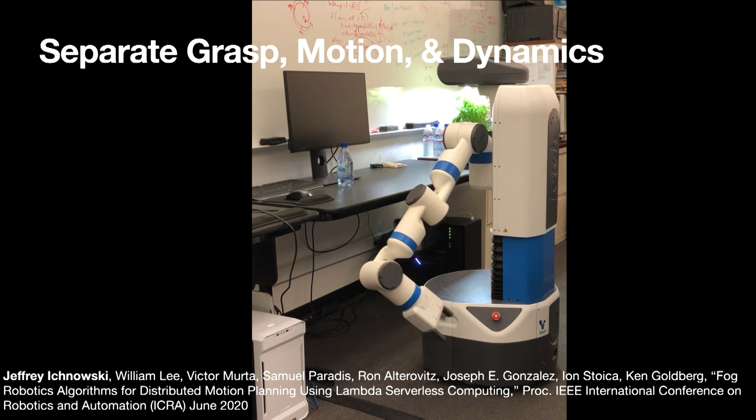So I'm going to get to my talk that I'm titling Dynamic Robot Manipulation, Learned Optimization, Deformable Materials, and the Cloud. But really, this is more my talk about how I like to make robots go fast and compute fast. A lot of my research started off, just to start the groundwork, looking at separate interests. Like, let's do a grasp plan, let's do a motion plan, let's do time parameterization, or treating the world as rigid, or looking at how can we speed up these limited computing capabilities that we have in robots.

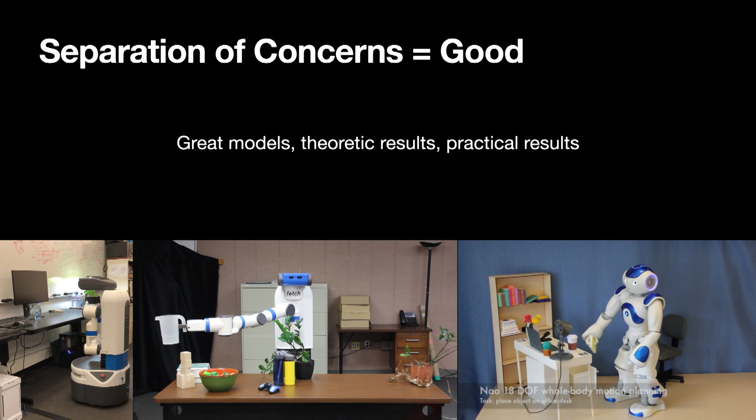Now these separations of concerns are good. From an engineering standpoint, they're great to have. We get great models, great theoretic results, good practical results. But now my interests are more in what can happen when we start combining these things together. If we do grasp and motion planning at the same time, can we have a faster motion because we can have that grasp perturbed towards having a faster motion? Or if we do time parameterization at the same time as the motion planning and the grasp planning, can we get very fast motions that have all these things incorporated in them?

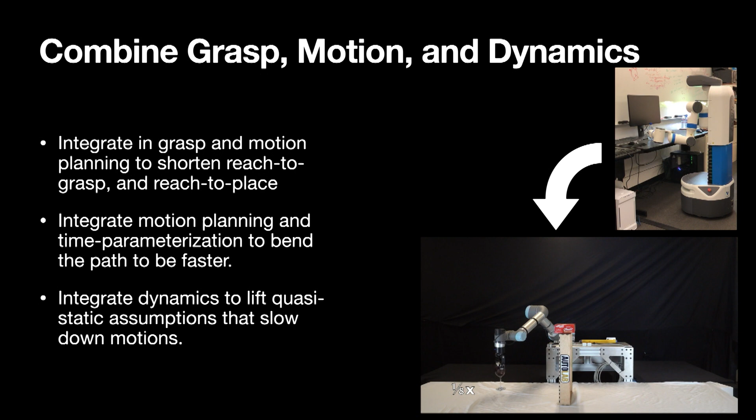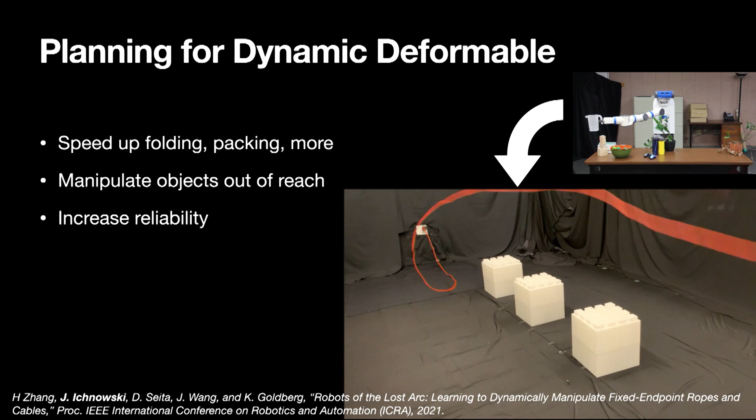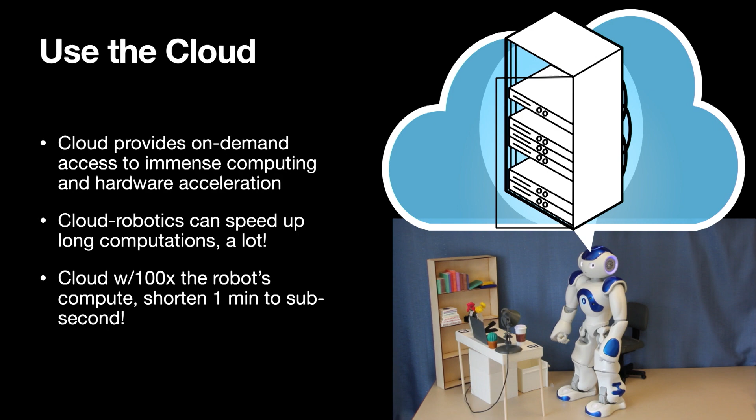And the last thing I'm going to talk about is using the cloud. The reason I'm proposing the cloud is because we want to be able to compute things fast in a lot of cases. With the power of the cloud, we can speed things up by 100-fold and make things that used to take more than a minute to compute run in a sub-second. We can start to get much more capability out of our robots that we might not have had unless we waited 10, 20 years for computing to catch up. So here's the agenda: this combination of grasp, motion, and time parameterization, learned optimization, dynamic deformable manipulation, and cloud robotics.

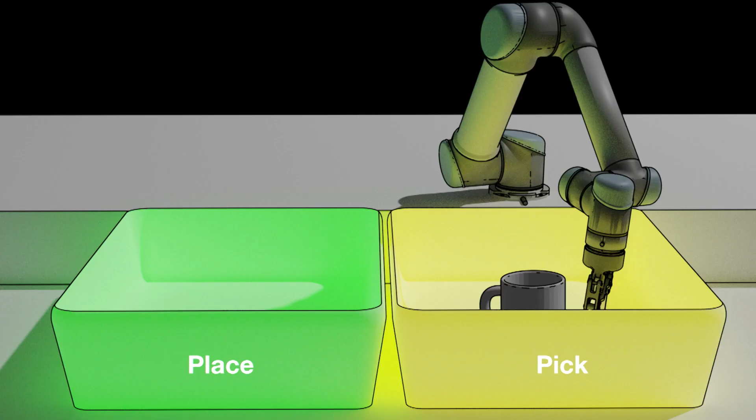So just to get started on the first agenda item: e-commerce. E-commerce is exploding today and cannot keep up with demand. This has been a huge motivation for this line of work. How do we keep up with demand imposed by the pandemic or by social distancing required within warehouses? A lot of warehouse operations boil down to pick and place, whether it's bin to bin, shelf to shelf, or bin to shelf. The pipeline looks something like this: at the front end you do imaging, segmentation, grasp analysis, and then motions to reach to pick and pick to place. But due to advances in deep learning, the front end is now insanely fast, and the physical motions of the robots are dominating the cycle times.

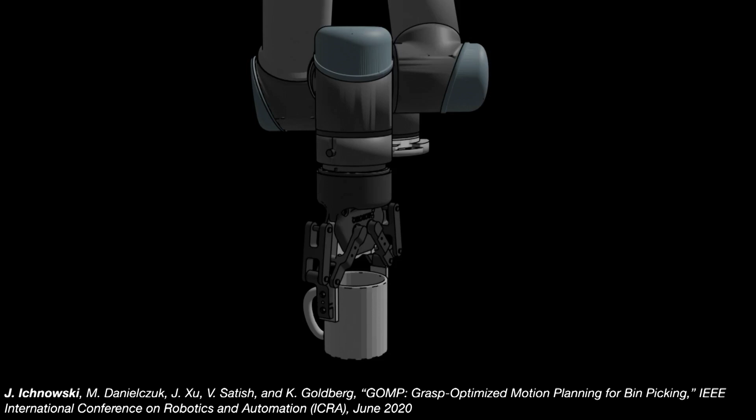So if we start off with a grasp analysis, say something produced by DexNet, grasp analysis gives these contact points that say we can lift up this object safely and robustly, and the object will not fall out of the gripper. In a normal pick-and-place operation, a gripper might take a top-down grasp, lift up the object, and go around. But our key insight here was that this actually implies a degree of freedom that we can incorporate into our motion.

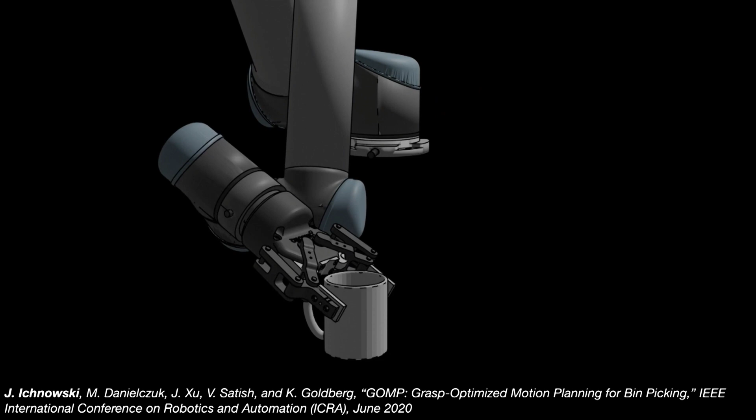Any of these poses around those contact points is something that we can use to speed up a motion if we can get our optimization to use it. So I'm going to give a bit of an overview of how we do this. This may be some material that everyone's familiar with, but it lays the groundwork for a lot of the other parts of the subsequent presentation.

So we came up with something called Grasp Optimized Motion Planning, GOMP, where our objective is to minimize trajectory duration subject to the constraints that I mentioned: we have these grasp analysis constraints, we want to avoid obstacles, and we have the joint limits that we need to obey. Of course, those first two sets of constraints are non-convex, and the way we approached this was to discretize a trajectory with a fixed time step and place it into an optimization.

And we have this quadratic optimization where our objective is to, in this case, minimize the sum of squared accelerations. Other formulations are, of course, possible. So first I'm going to describe how we minimize this, and then how we minimize the time on it. Putting together our optimization formulation, we have our joint limits: the configuration limits, the velocity limits, acceleration limits. We have our boundary conditions that we want it to start and stop with 0 velocity. And we add in an MPC-style constraint between each of the waypoints that we've discretized to.

And then for the non-convex constraints, we use essentially TrajOpt, the formulation that they have. The way this works is that you take an obstacle, for example, this bin wall that we're trying to clear, and you want to keep the robot out of that. But since we're optimizing in the joint space, we need to go through the Jacobian and do linearization of the constraint. Of course, this linearization is only good for part of the motion. If we continue to optimize, it will be invalid. So yeah, this is what it looks like, and I will get to that in a second.

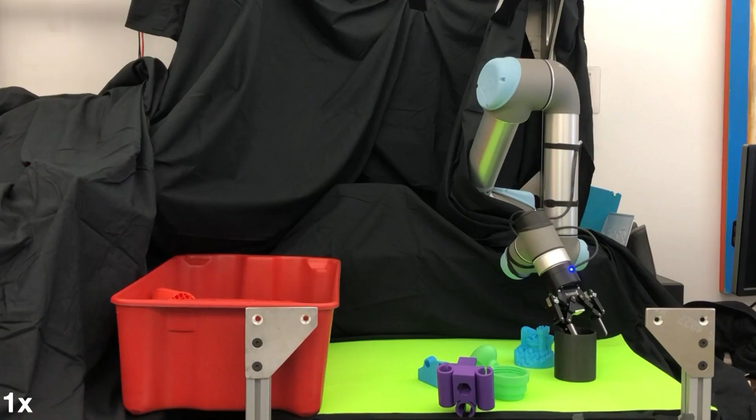And one of the things I want to point out here is that this trajectory has properties of time-optimal trajectories, where at any point in time, one or more of the joints is at a derivative limit, a velocity limit or an acceleration limit. So we put this all together, and we get a very fast pick and place. We beat our baseline by a significant amount. And one thing that's actually kind of surprising is that our bottleneck actually became the gripper close speed. The gripper takes more time to close and open than the motion after this optimization.

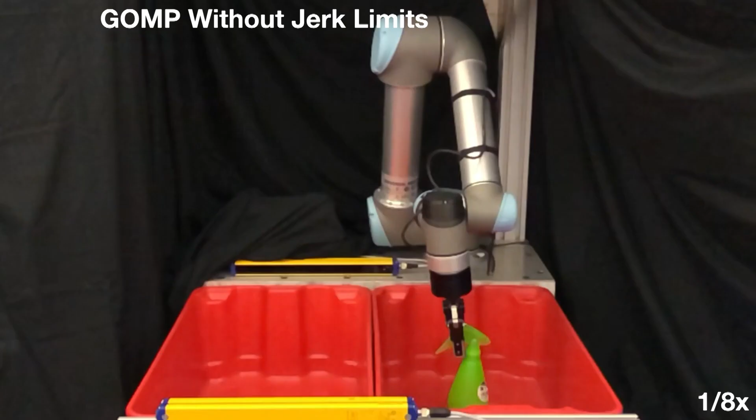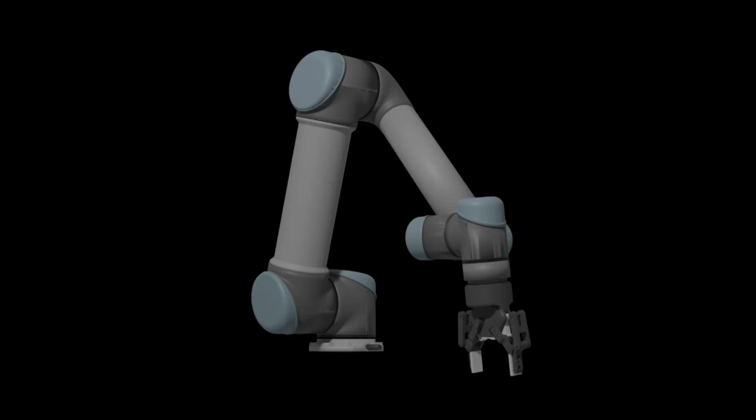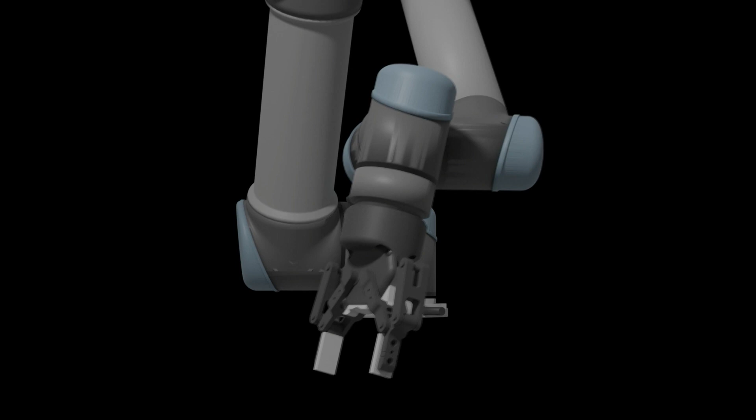So we took a deeper look into this, and we found that we weren't doing any jerk limits. As an implementation detail, this robot is an industrial robot. We do not have access to directly control its motor torques. We have to tell it the trajectory that it's following, and its internal black box controller is doing its best to follow it. But without the jerk limits incorporated into our optimization, if we play back the planned trajectory and overlay it with the trajectory we get from the encoders, we see that there's overshoot at the end, and that's due mostly to not having that jerk limit. The other thing we're worried about is stressing the joints and wearing out the motors over time. Now, we added jerk to this optimization, and a surprising thing happened.

The compute time blew up to 28 seconds median time, which, of course, is really not useful for sub-second motions that we're trying to get. So we don't want to spend 28 seconds to get a sub-second motion. So this leads into the learned optimization aspect of the talk. So we looked at speeding up this computation from two sides. We sped up the outer loop and the inner loop.

Oh, yeah? But our torque, I know the URs don't give you access to torque, but are torque limits a thing? I mean, if you were carrying a heavy object, would you still be able to live near those acceleration constraints published by the UR, or is this a... You have to adjust your acceleration constraints proportionally, yeah. You adjust them in proportion to the weight? Yeah. That's a good enough heuristic? Or? Yeah, it seems to me, yeah. I mean, we could probably push it a little bit more if we directly incorporated a lot of those constraints. So far, we're going kind of fast enough for our purposes.

So I'm going to talk about speeding up the outer loop and the inner loop, and start off with this outer loop. And so this outer loop was our Science Robotics paper, where the idea is, let's see if we can just take this pipeline from before, where we have this input trajectory, we run it through our SQP, minimize time, run it on the robot, and see if we could do deep learning to learn the function. Could we have it just play back trajectories that execute as fast as our SQP was able to do?

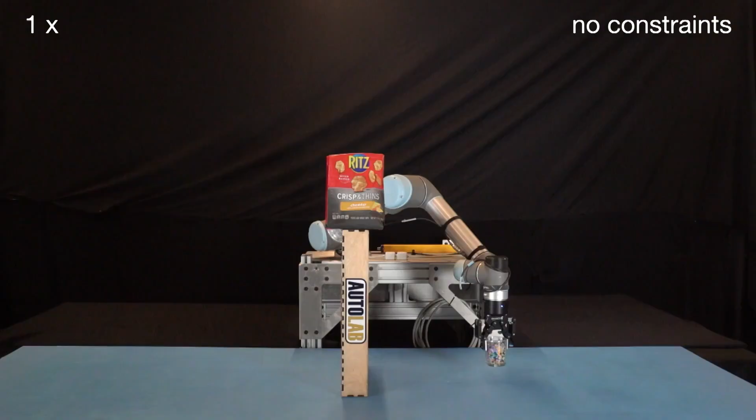Moving on to dynamic deformable, my slide was a bit of a lie. There's actually 3 parts to this, not 1 part. So, getting back to our motion planning, we found that we were moving the robot too fast. Fast enough that when we have an open top container, everything starts to fly out of it at the peak there. And at this point, I should give a big shout out to Yahav Avigal, who spent his time cleaning up those beads.

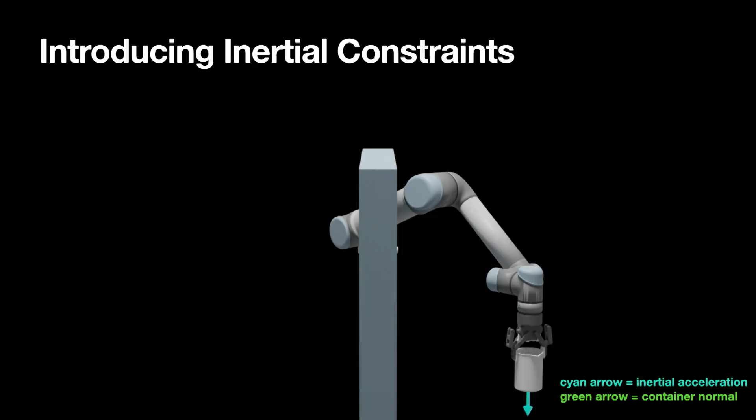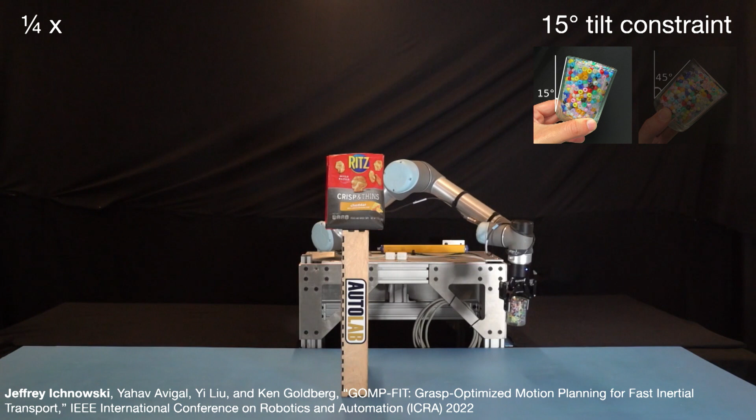So what we decided to do was introduce inertial constraints. Basically, compute the acceleration experienced at the end effector and use that to form a constraint in our increasingly growing optimization so that we're never exceeding a tilt angle at which contents will spill out. And here you can see what I found a cool emergent property: we just specified this constraint, and the optimization figured out that it could go back and build up momentum to swing over the top. You can see that right at the beginning there.

The next thing we did was adjust that constraint. If we have a 15-degree angle to keep the contents in the container, we necessarily have to move slower, but if we can tilt the container 45 degrees before contents spill, perhaps we can move faster, and we can. This is also a cool emergent property: we actually see the beads go upside down. If we tried to plan this quasi-statically and then time parameterize it, we would not come close to that capability.

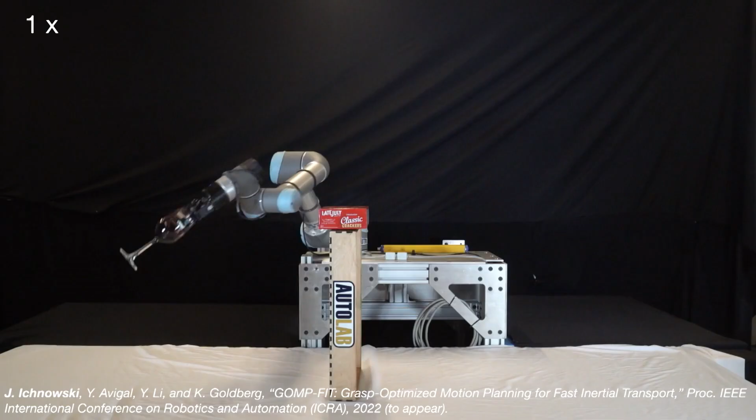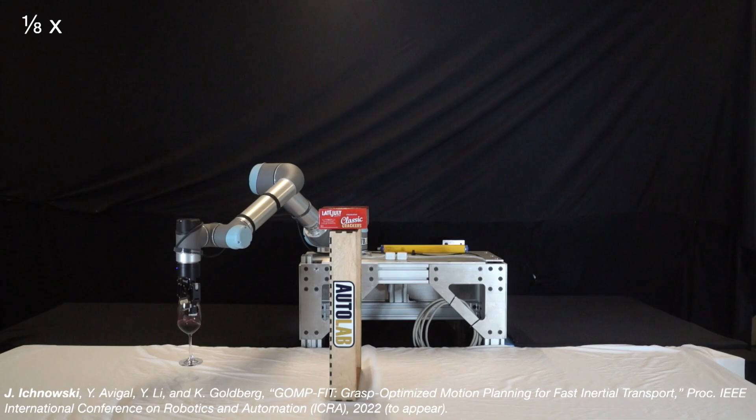So the next challenge, and this is a fun story, was a challenge from Ken Goldberg about 8 hours before the paper deadline: could we do it with wine? And we did, and here's what it looks like in slow motion, which of course was that first slide. Real fun project. And I want to point out there are no wine drops on that cloth.

All right, so dynamic deformable manipulation part 2. We also wanted to see how fast we could move things in suction. A big problem with suction is if you lift up an object too quickly, it's going to peel out of suction.

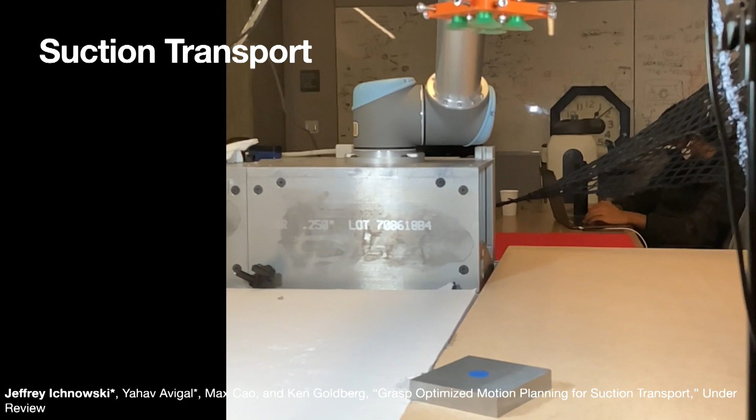How are you determining the tilt constraints? Are you hand coding different ones and seeing which suffice, or are you actually learning what the boundaries are? For the tilt constraint, we literally say if this object spills beads at 16 degrees, then our tilt constraint is 15. Okay, so you're just figuring that out. Yeah. In actual engineering production, we would need some sort of classification network or vision system to analyze and figure it out.

Thank you. Good question.

All right. So suction transport. If we move too quickly, things will come out of suction, and so our problem here was, could we now move things in suction without having this grasp failure?

And the initial idea is, let's formulate this as a bunch of analytic constraints. Let's say we have the suction friction cone that we want to keep. We want to keep the suction force within a threshold. We want to keep the moment balance, and we could continue to come up with models and analysis for how to formulate these constraints to keep the suction grasp through a transport.

But one of the things that we looked at was when you look at the slow motion video capture of these, what happens is there's actually a deformation of the suction cups before the suction breaks. And in that time, if the robot sort of pushes back, it will retain suction. So how do we come up with an analytic model for this?

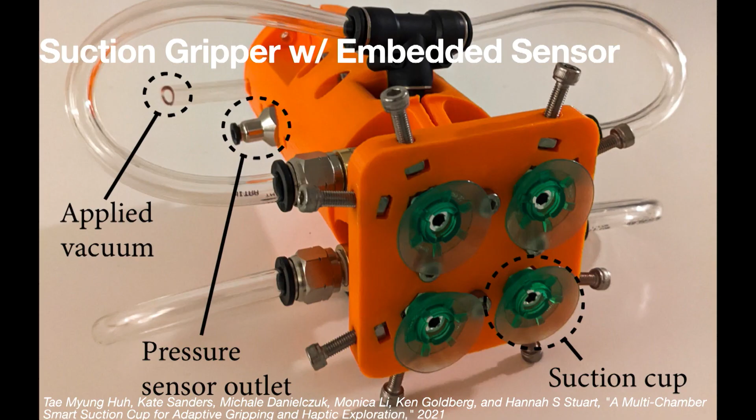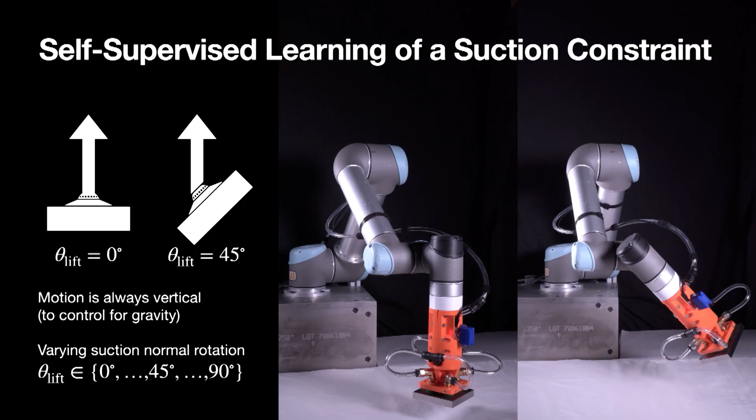And to make this training really efficient, we built this 3D printed suction gripper. And the key point here that made this really easy and possible is we have that pressure sensor outlet that allows us to detect when suction breaks really quickly and really reliably. So our self-supervised learning system essentially just lifted the object vertically with a whole bunch of different motion profiles, and did that at different angles as well so that we could control for gravity. And we striped through a whole bunch of different angles for different masses.

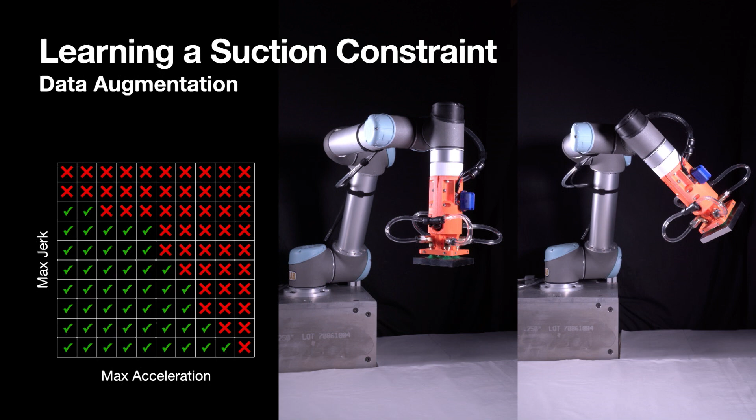But we were able to use some domain knowledge to speed up our training process. We essentially could do a boundary search saying that, as we start exceeding the break threshold, we can start looking below that and so forth. And so we really reduced the amount of training that we had to do. And of course, we used domain knowledge to extend this to say that any time that we have a successful transport without suction break, if we go slower, we can label that as a success. And anytime we go faster than a suction break, we can label that as a failure.

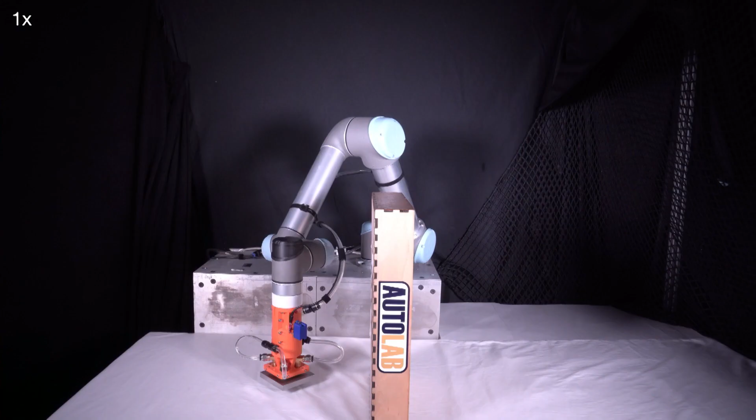And then the problem is how do we integrate this into our constraint? We have this function that we need to linearize into our optimization from before. And the nice thing here is that we could just use the autograd straight out of the network. And so this forms our online process where we take our inputs, we run it through our SQP from before, and we linearize that constraint and use the Jacobian from the network to help with that. And then we get reliable transport of objects in suction without the suction failure happening.

And so when we look at some of our baselines, we compared this to 2 analytic models.

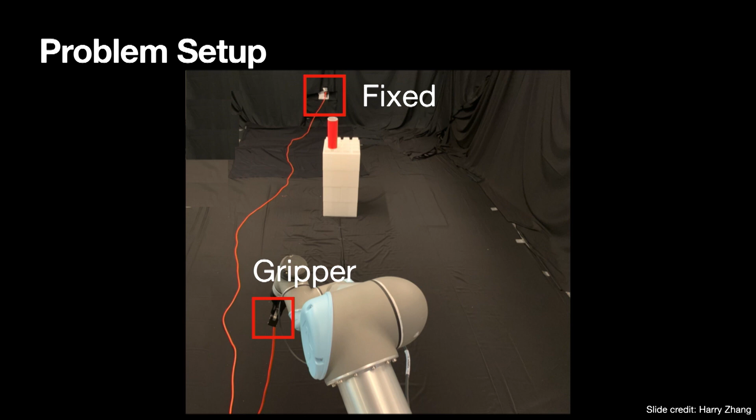So what would a robot do? Well, it would normally just traverse back. We wanted to speed that up. And so the way we set this up was we have this fixed endpoint on the wall where it's plugged in, and the gripper is holding the other end.

And we approached this sort of borrowing ideas from TossingBot, where we said we're going to have this fixed start and end pose for the robot, and we're just going to learn this apex parameter, this apex of the motion, and we're going to fill in the trajectory with a trajectory function, which just happened to be GOMP from before.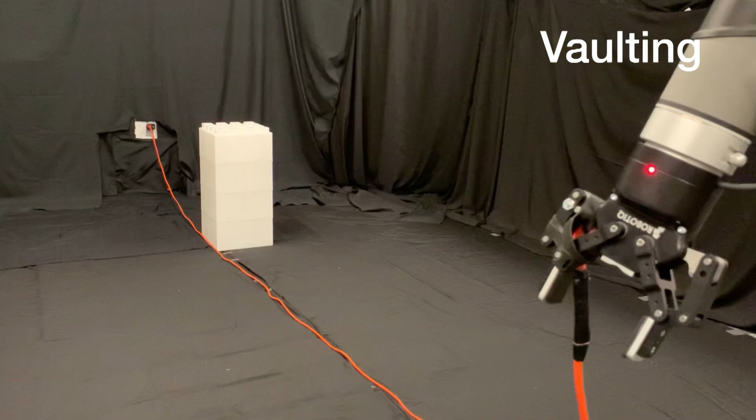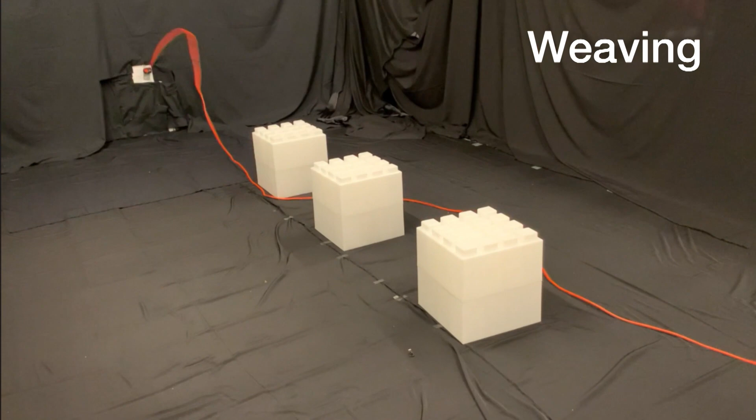And so we tried it out in the vaulting experiment, where we can vault over distant and nearby obstacles. We can knock targets off pedestals, which don't ask me the utility of this. If you guys have ideas for the utility, it's more a demonstration of the capabilities, but I don't think we want robots doing this. And then we also did weaving, where we weave between obstacles from near or far and at different separation.

So the results on this are pretty good. I think we could do better. Would love to discuss how we could do better. And one thing I don't want to skip on is this huge shout out to Harry Zhang, who was an undergrad, who's now at CMU, who did the bulk of the work on that project.

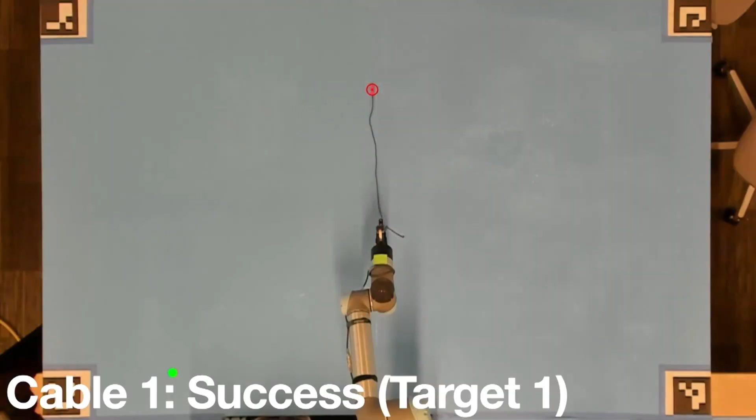So the other work that we've recently done is free-end cables and trying to hit a target on a sliding surface. So we now have to deal with the frictional aspect of this as well. And we set up a self-supervised system that looks like this. We do a whole bunch of physical data collection, and from that, we tune a simulator to match as close as possible using differential evolution.

And we then collect a whole bunch of data in simulation and train a policy. And we also pipe in the physical data trials as well to learn this policy to hit the target. And probably the most interesting result from this, I find, is that when we train just on physical or just on simulation, we don't do as well as when we train on both.

And sort of the intuition, I think, is that we have really high fidelity data from the physical trials, but we don't have a lot of them. And we have a lot of data from the simulation, but it's not as high fidelity. And so with that, I'm gonna move on to cloud robotics. I haven't figured out a smooth transition here. I'm just gonna go from dynamic deformable manipulation to cloud robotics, yes?

So you're using some model tuning to train the simulator, but then in step 4, you're just using policy learning. You're not doing model-based learning in step 4. Right. Okay. So you're mentioning that you can get pretty repeatable behavior when you're initializing. How much did it matter? It looked like the rope was initialized very close to the block that you were flipping over. So if you moved it far away, did that matter?

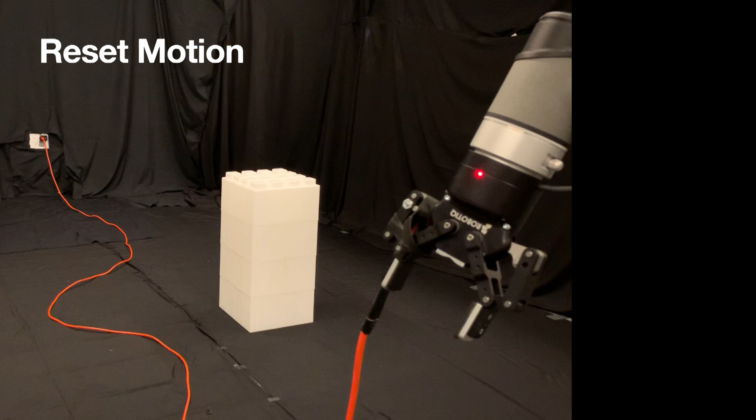Oh, I see. Did the picture answer your question, or I'm sorry, I was going back to the slide. This is what you're talking about, right? Yeah. The reset motion as well? Yeah, the reset configuration. So how much did the repeatability depend on what that choice of the reset configuration was? Or didn't? So if I understand your question correctly,

there's really only one reset configuration we have here, which is pull tight, and it's just the line between the wall and the robot where we lift it up and lay it flat. Okay, so it was specific to that one. Yeah. Got it. We try on multiple cables as well and show results for that. I don't know if I fully answered your question, but looking at time, I'm going to move on, but maybe we can get back to that later.

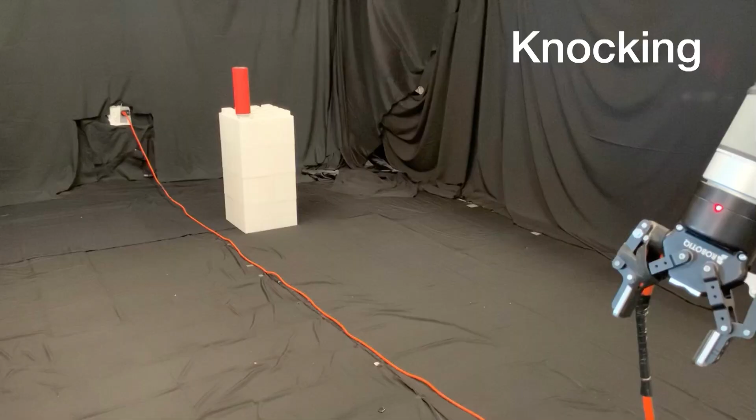All right. Oh yeah, and I wanted to give a big shout out to Vincent Lim, an undergrad at Berkeley, who did a huge amount of work on getting that simulation tuning to work. And then, so now cloud robotics, no good transition. So one of the things that I've been thinking about with cloud robotics is the computational aspect. I talked a lot about speeding up the motion before. Now I want to talk about how do we speed up the computation for these motions.

So a big motivation for this is that all these different robots have limited computing capability. They have it due to battery requirements, mobility requirements, weight or cost, or even just age. A robot might last 10 years and still have a 10-year-old processor in it. In contrast, in the cloud, if you can suffer the latency and bandwidth to get to the cloud, you get access to enormous amounts of computing. And of course, there's these concerns about outages, security and privacy. But right now, I'm going to do what all good scientists do and just assume those out.

So let's say we have a robot that wants to get around a room. I'm sure everyone is familiar with sampling-based motion planning. One of the ways we can speed up motion planning is just exploit multi-core parallelism. Just sample really efficiently on a lot of cores simultaneously. So here's an example from early work I did with speeding up motion planning using lock-free parallelism.

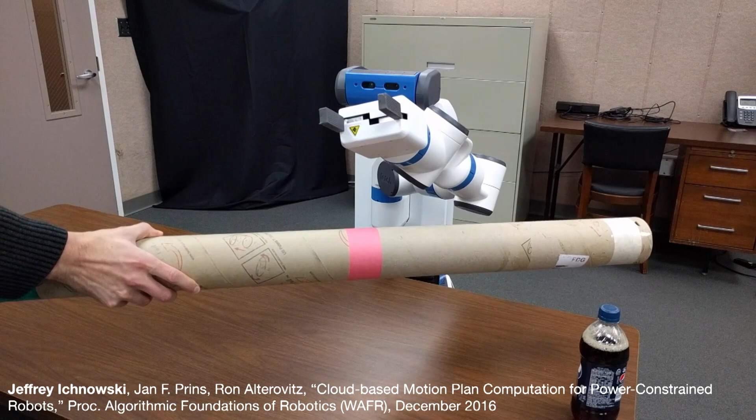And when we applied this to a manipulation problem, here I am torturing the Fetch robot, where it's got this plan coming in from the cloud, and I'm presenting a novel obstacle that it is computing locally based upon this larger map that the cloud is computing.

So one of the things that comes up, though, is that having an always-on high-end computer for this type of problem is not really an efficient use of resources. Let's say we wanted to have a robot declutter this building, it's going to have navigation problems and manipulation problems. The navigation problems are low-dimensional, the manipulation problems are high-dimensional, which require different amounts of compute. And there's also times where the robot is just moving and not needing any compute.

So we could plot the CPU usage over time, and it would look something like this. And then maybe occasionally you get a really complex decluttering problem like this. So we looked at, could we speed up motion planning using serverless computing? Serverless computing, at a high level, is you give the code for a single function to the cloud provider, and then you run it whenever you want. And the nice thing here is you bill in 100 millisecond increments.

But serverless computing has a lot of limitations. I'm going to skip through all of them except the most important one, which is that you don't get any additional computing over what you might have in the robot. You've got 2 threads, maybe, at max on that serverless instance. So the idea is if one multi-core Lambda is too slow, maybe we can use a whole bunch of them in parallel.

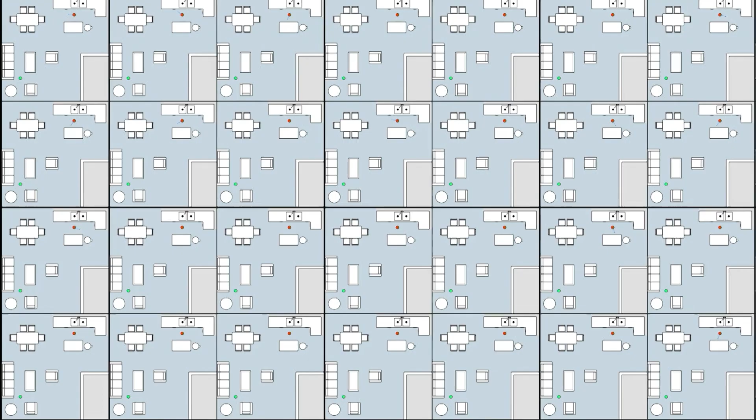So it's really a combination of two parallelized motion planners, one that parallelizes within the lambda, one that parallelizes across lambdas. And when you run them together, all they have to do is share that best path found so far, and it improves the ability to sample faster and produce a better solution. So we could run it on tens of lambdas simultaneously, or hundreds, or even 1,000 lambdas simultaneously.

And just to show what the results look like on the standard OMPL benchmarks, we can see that our convergence rate dramatically improves using multiple lambdas simultaneously. So I'll skip through the rest of these examples, but you see similar results, that you just get massively faster convergence on all these problems using 100 lambdas compared to fewer lambdas.

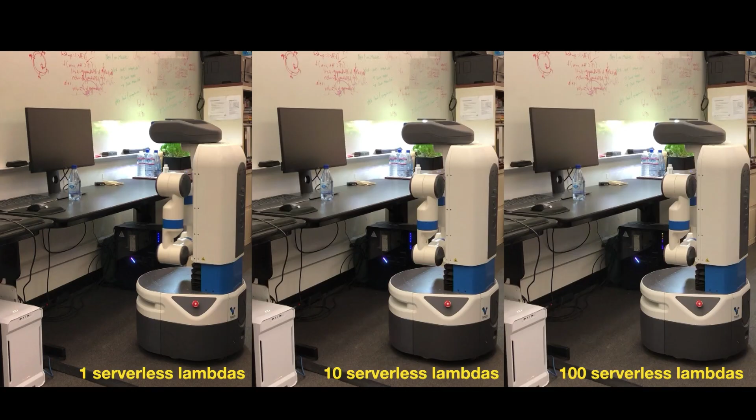And we apply this to a manipulation problem, and compare 1, 10, 100 lambdas executing the same problem for the same amount of wall clock time. And you can see that the 100 lambdas using that asymptotically optimal motion planning can find a solution that reaches the target much faster than the 10 lambdas. And in the same amount of wall clock time, that one lambda, or the robot itself essentially equivalently, could not find a solution.

That's it, no change in code, to say, let's move that grasp planner node to a GPU instance in the cloud. And FogROS takes care of the rest. It sets up a machine in the cloud, sets up ROS on it, moves all your code to the cloud, all the dependencies, sets up secure communication, and also optionally compresses the video stream to the cloud so that you can start to do things like SLAM in the cloud.